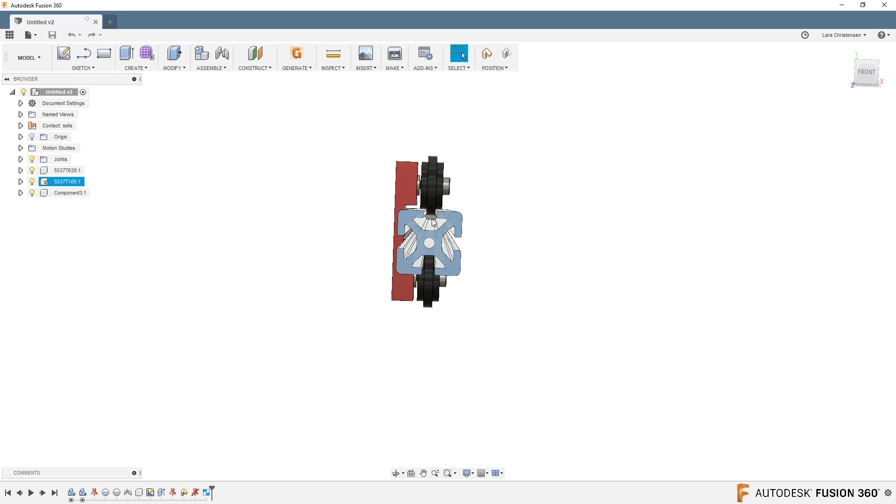But what we did was we brought this rail and this roller thing here in from the McMaster-Carr catalog. Then we created a joint origin that placed the wheel right on the track. We had a sliding joint, but then we put a limit on that joint so it couldn't roll off, because that's a good thing. We could also have used a limit on the other end, but instead we used these contact sets. That means that when this red bearing comes down and literally hits this gray block, it will stop. That's contact sets, found under assemble down here.

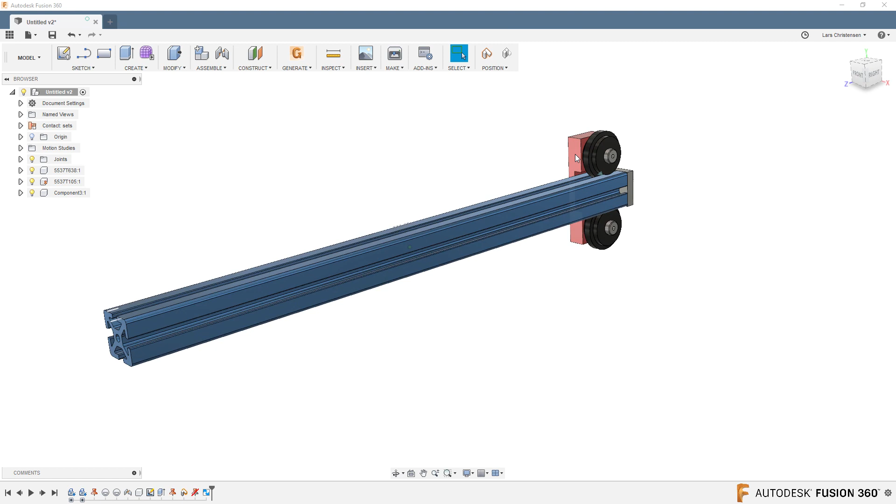Today you'll see I'm going to use the rewind revert position, which just means this roller is going to come back to its original state. So before we get too far into today's topic, I'm going to roll all the way back to the beginning and take you through it.

So we brought in the McMaster-Carr rail. Now you see how they kind of came in here in the middle of each other. We grounded the thumbtack, we grounded the rail, did that by right-clicking and hitting ground. Now we're not going to unground it. That makes sure that this rail is locked into place. This is going to be one of my, I don't want to call it bad habits, but kind of where the title comes from. We're going to change some of those things today.

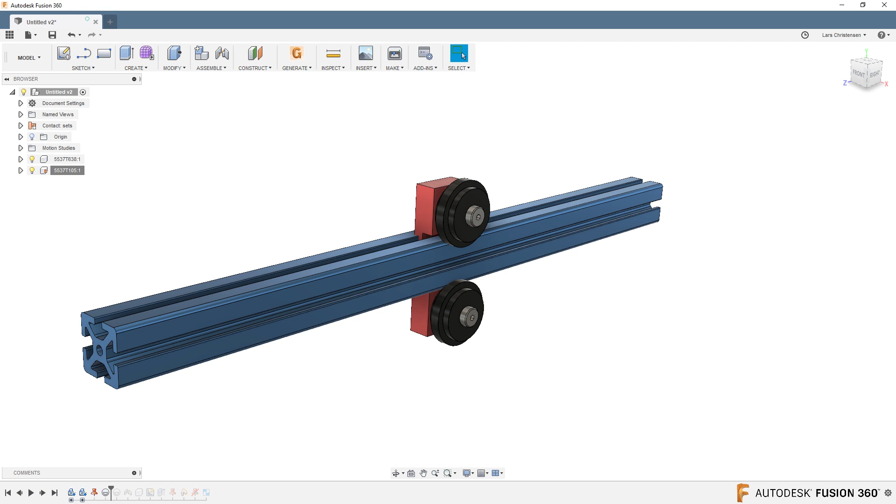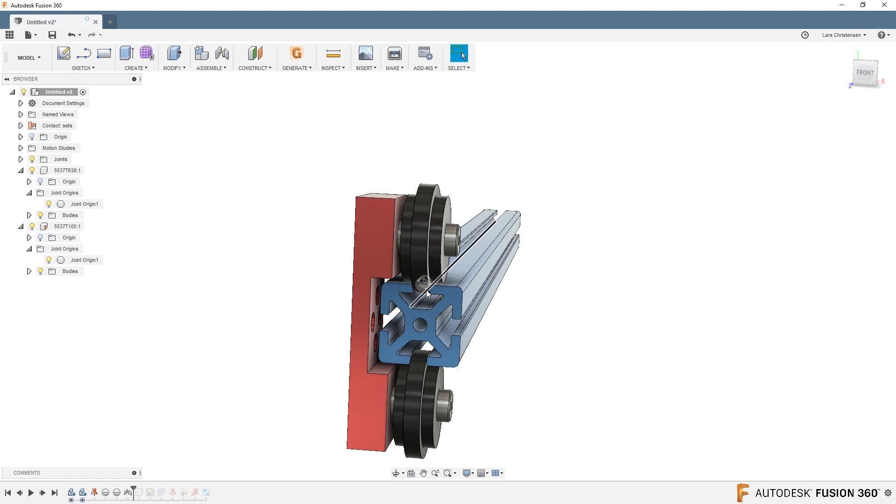After we've done that, we created two joint origins. Now they're not going to show up anywhere on the screen unless we go into each part, each component. You will see we created a joint origin on the roller there, and a joint origin on the rail there, and then we mated those two together. If you're wondering about those joint origins, again, live stream number 184, that's two ones back, so go a couple weeks back here.

And when we created that, we also created a sliding thing where, to limit it, we went into the joints folder, found the slider, right-clicked on it, and selected edit joint limits. We talked about the importance of maximum and minimum. But generally what we did was we said stop here, but then we just put a fictive number that let it roll off the rail down here.

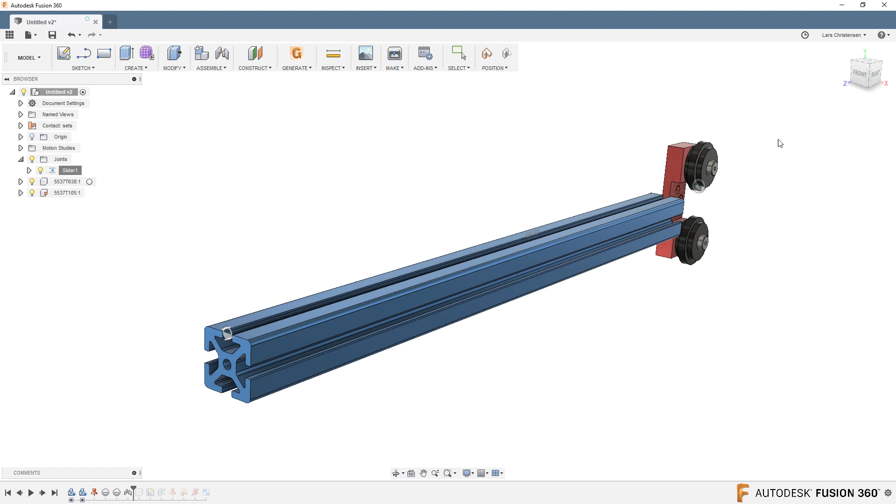And then I took the opportunity to show you that if we created a component, a couple of sketches, I kind of created this little block down here, a stopping block. Now that one at this point was floating around, right? So what we did was we thumbtacked that one into place by right-clicking on it and saying ground. So now that is in place.

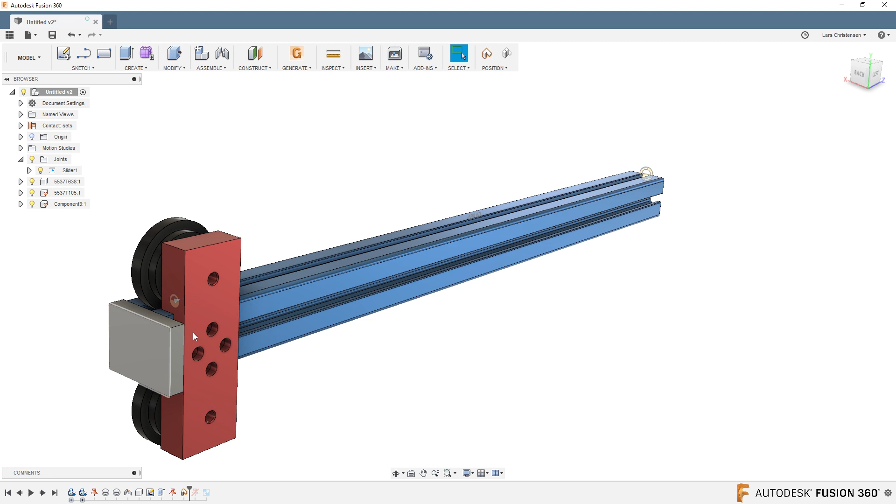And then I did slide down with a revert here. And then we created this contact set so that when the red portion slides down and hits the gray one, it stops. So a little bit different than a joint limit, where we actually have these two joint origins kind of like limit their travel. With the contact set, we're actually kind of banging into this gray piece, and that kind of resolves that.

Now, I talked in that live stream at the end that using thumbtacks maybe is a little bit of a cheat. You could instead, and then I deleted it or removed it, use a rigid group, also found under assemble, where I grouped these two together as a rigid group. It means they couldn't move. So that is this part you're seeing on your screen here from live stream 184. So maybe you need to rewatch it, maybe you don't, maybe you're all set now.

I don't know, all right, so we're 6 minutes in here. Hope that was a good review, just trying to catch you up. If not, again, watch 184. Let's move on. So the question that came out of this live stream, but was a very good one, a couple different ones, was that, okay, this is all cool, we now got this thing moving along here.

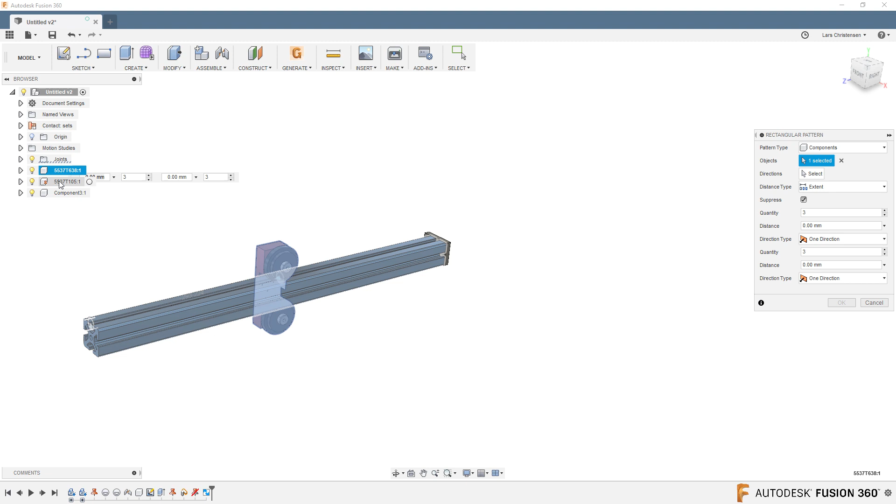Revert back to center. What if I wanted to pattern this? We could go create pattern, and let's do a rectangular pattern. Click on that, and instead of selecting faces, I'm going to select components. I'll select 1, 2, 3 components, then say in a direction, and select this edge here. Let's drag a couple of patterns out and hit OK. Okay, that looks pretty promising, right? Until you start moving around here and you realize this is maybe not what you wanted. You wanted this.

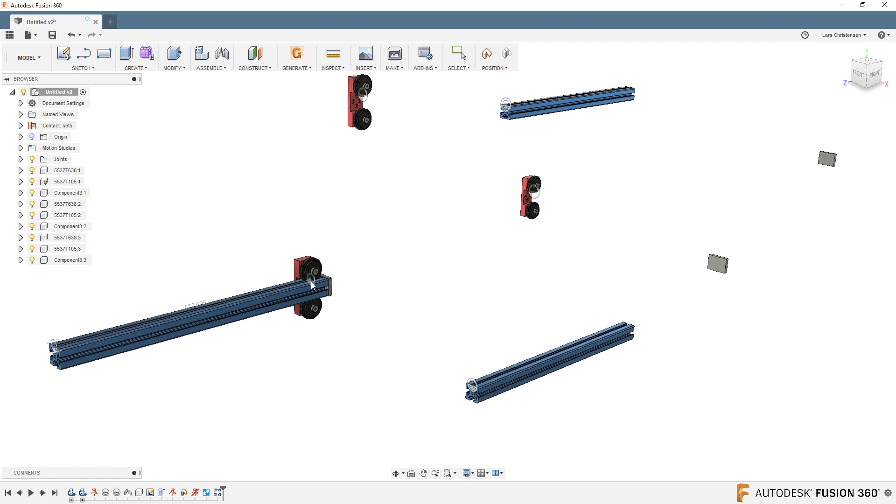Let me just go delete that rectangular pattern, back to normal. The other question was, I have this, now I want to mirror it.

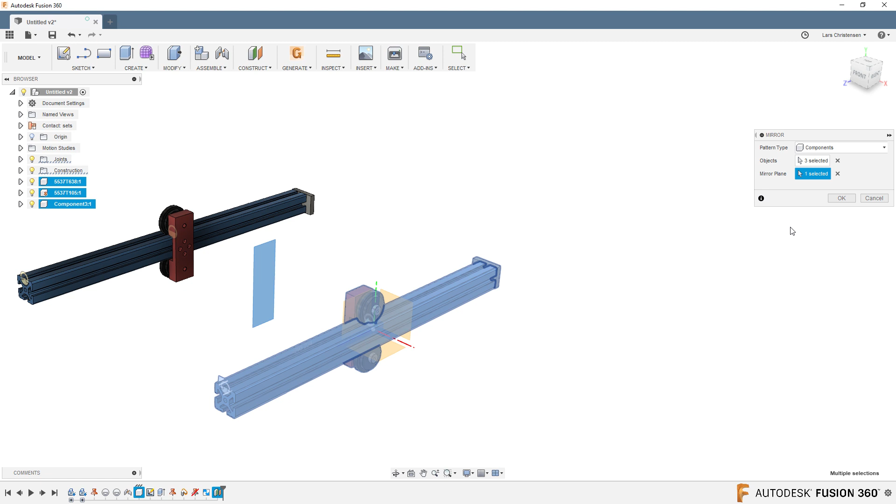So we click mirror. Let's do a mirror 200 millimeters from this face. Do kind of the same thing, go down here and say mirror. Instead of faces, let's say component. Let's select those 3 components. Boom, let's mirror it over this plane. It all looks good, but kind of same issue. Everything's floating around. I want this.

Do I really have to do all the work? This is not really what I was expecting, Lars. Come on. Well, what are we going to do?

Well, we have a couple of different things we are going to talk about. My goal today is to shine some light on the ways that Fusion handles some of this stuff, and hopefully that would be somewhat useful. So this is where it kind of comes into Lars's bad habits, and I do have them. That's absolutely true. What happens is the same thing that I think happens to most of you guys.

You're modeling things up kind of in the order of what you think you're going to need it for. So when I modeled this thing up, I never really thought about somebody gonna say, well, we gotta pattern it. And this happens quite a bit to me too. So don't think you're out of this, where you model something up and then you're thinking, all right, now I wanna do this, and then you're like, oh, wait a minute. So we're gonna talk a little bit about best practices, and doing things possibly a little bit different, and see what happens in Fusion as I model this up here.

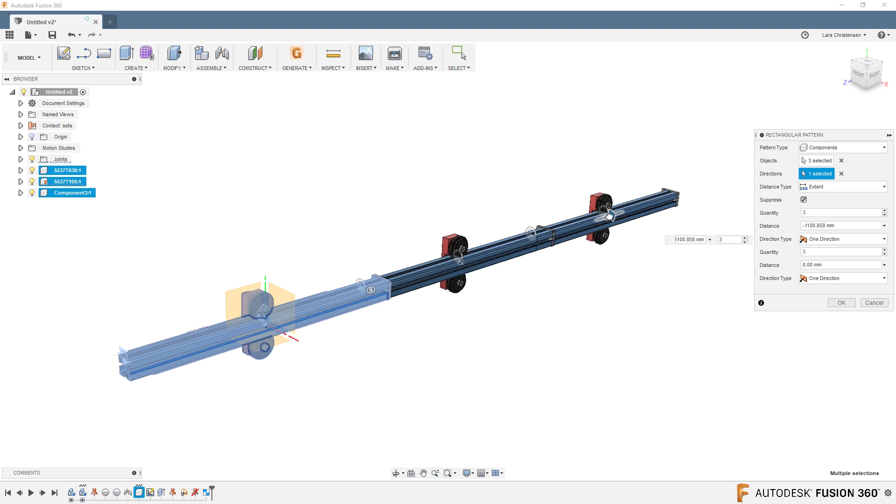For example, let's just use the pattern example right now. If I go in and say a rectangular pattern, we saw that before. I select the components and I do a direction. But what happens here is that I'm just patterning the components. I'm not patterning the joints or the contact sets or anything like that. So that's the first thing to understand, that when you say pattern components here, well, that's all it does. It just patterns the components.

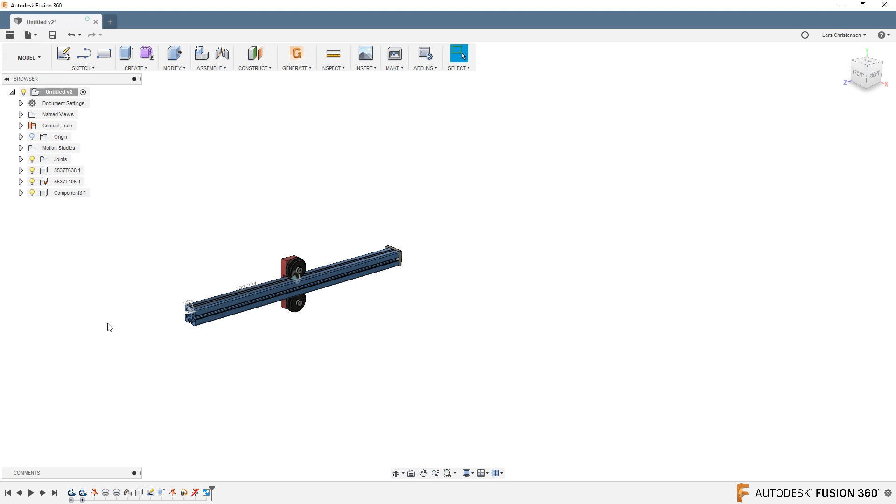Now there is a way around this, and I'm gonna mix in what I would call my bad habits as I'm going along. But check this out. If I went in and created a new component up here, see right now this is an assembly. We know this is an assembly because it has the assemble icon up here, and then we have 3 components within that. That becomes an assembly, and that's the only place we can make joints, really, is inside an assembly.

If I go up here and create another component, there's nothing inside this one right now. Let's just right click here so we can name it. Let's call this a sub-assembly. Now again, there's nothing in here. And by the way, while we are naming things, let's go up to this end plate and rename that. And also the rail, because this is the one that's going to matter the most as we're going along here. We could call this a wheel.

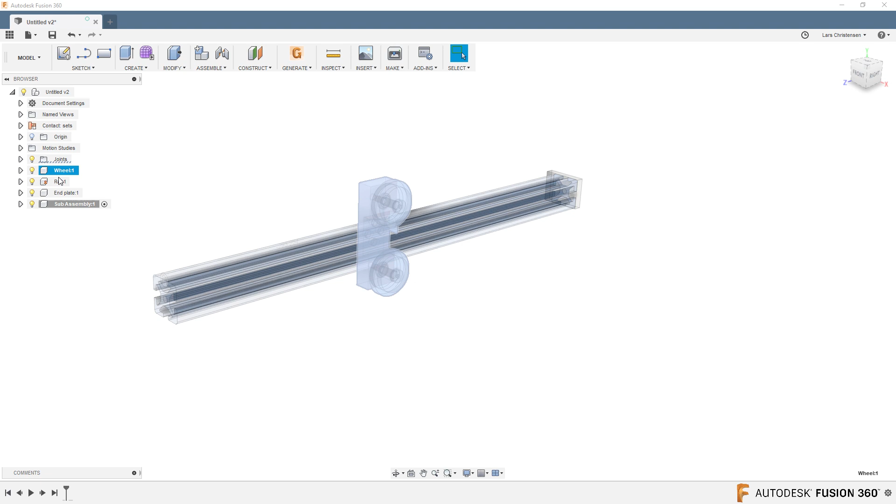Now we've done all the stuff we needed. Okay, see right now in this sub-assembly, check this out. If I go up and take the wheel and the rail, hold down control, and the end plate, and drag them into this sub-assembly folder, then this does become a sub-assembly within the assembly. See how the icon changes? Let me just do a Control Z, undo. See how here it just is normal, it's just an assembly. It's not a sub-assembly, it was just something we named it. But as soon as we drag these 3 components into it, it now knows it's a sub-assembly.

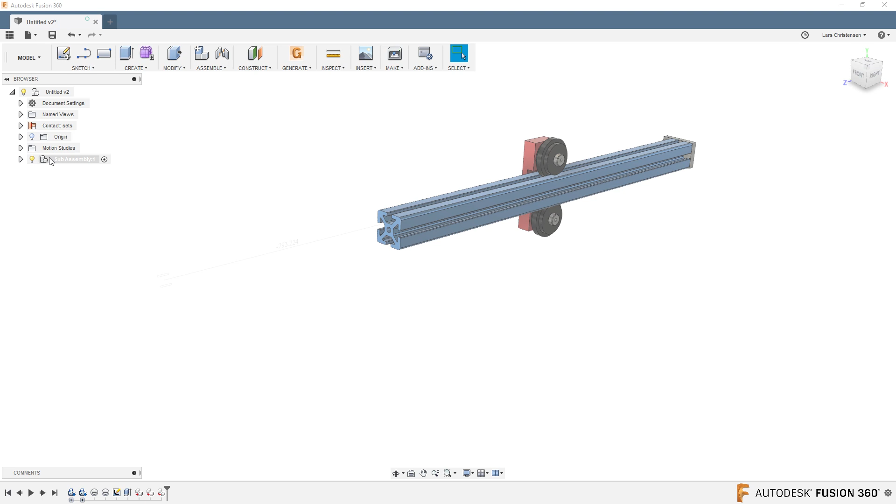Now notice an interesting thing here when I hit the little arrow next to it. The joint folder went with it.

Okay, that's interesting. So when components with joints get dragged into another component, it becomes a subassembly and brings the joint folders with it. So remember that. That's a good thing when we're getting into patterning it.

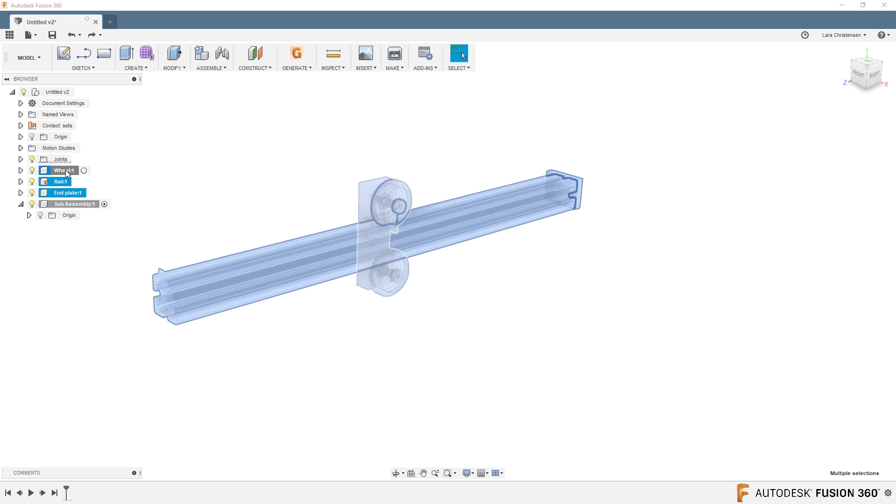Let me just do a control undo again, back to here. We had the rail set with a thumbtack on it that had been grounded by right-clicking and saying ground - that's just putting a nail in space so this thing can't move. Also note that inside the joint, besides our slider, we had that rigid group where we grouped these together. Notice what happens when I drag these three components into that subassembly - it makes it a subassembly. Notice the thumbtack is gone and the rigid group is gone. What that really means is when I dragged it into a subassembly, everything is loose.

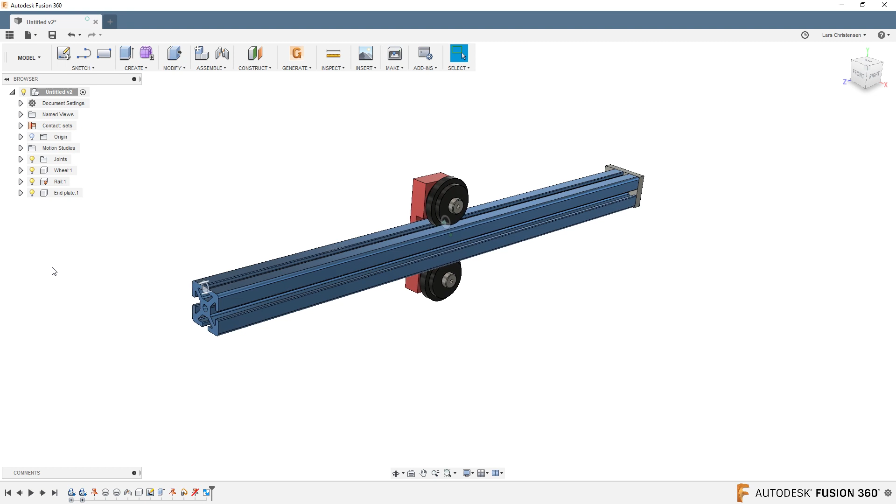So this comes a little bit to bad habits from Lars, if you want to call it something. Let me just delete this subassembly again and go all the way back to when I started this whole thing. Now I'm back to where I started, like when I brought the file in. So a couple of things here that I call my bad habits, or things you should be aware of when you're working in this environment.

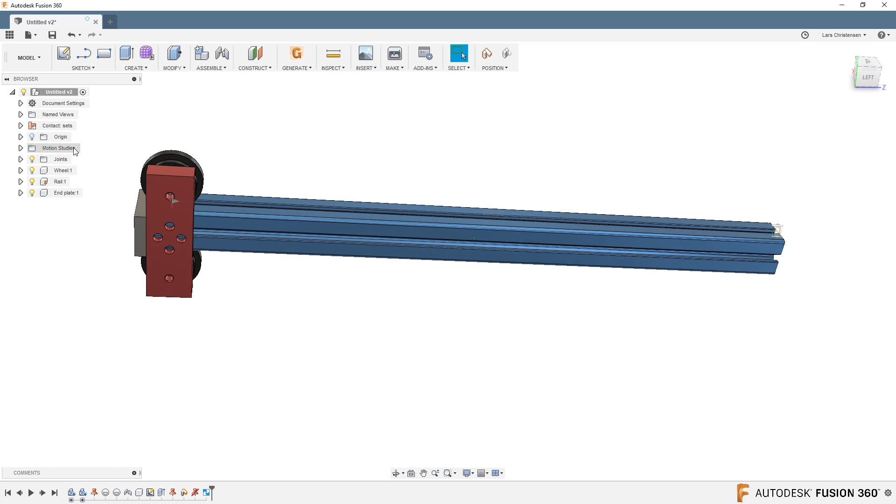First off, be aware of the contact sets. Remember, dragging this thing up and slamming into something - contact sets will always work at the top of an assembly. They cannot go down to sub-assemblies like we did before. So that's important to know. And then also, as contact sets are cool because they kind of see that stopping block and slapping into it, they are very heavy on computer power.

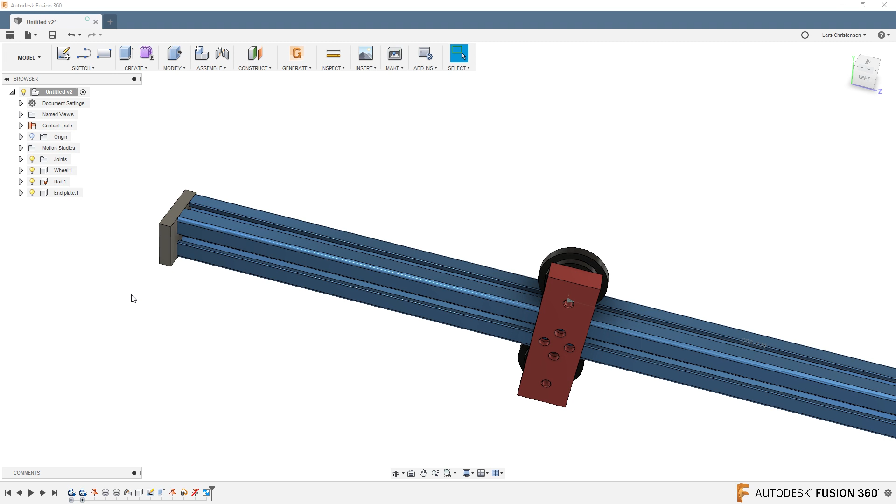So as your assemblies get bigger, contact sets could drain it down. So for my first bad habit, I'm actually only going to use contact sets whenever I really need it and couldn't use a joint. So I'm going to right click here and disable the contact set. Now you see it's gone. Again, if you didn't watch live stream 184, contact sets sit under the assemble dropdown. This means that now this thing can drag back off here.

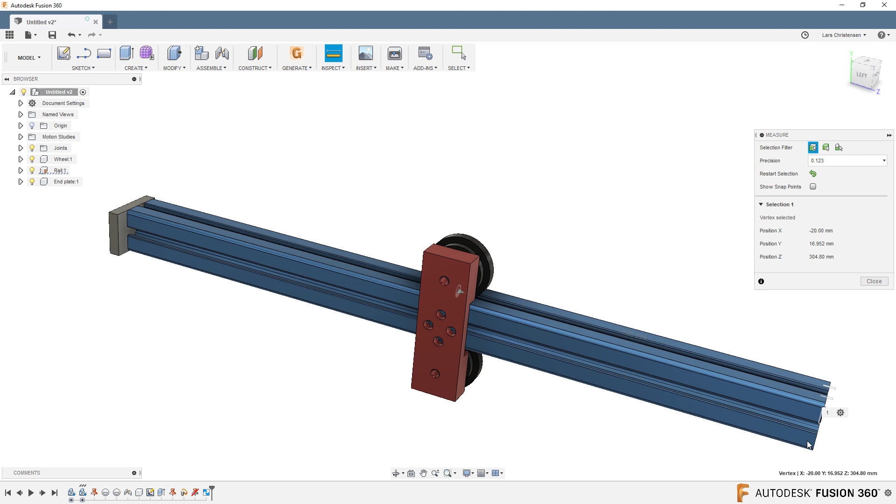So what I'm going to do is a quick measure - I'll select a point over here on the edge of the rail and a point over here. And if I check XYZ delta, that will give me the distance - 609.6. I can't remember anything, so I'm just going to click on this. Now it's copied to my clipboard.

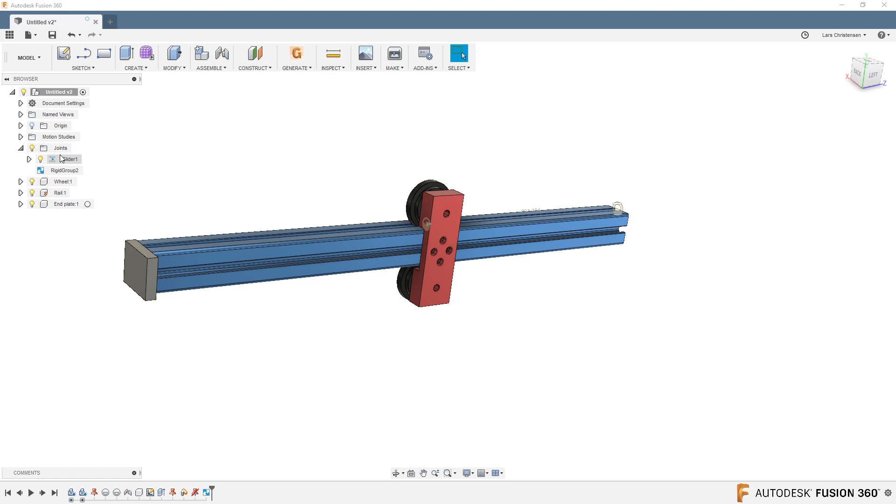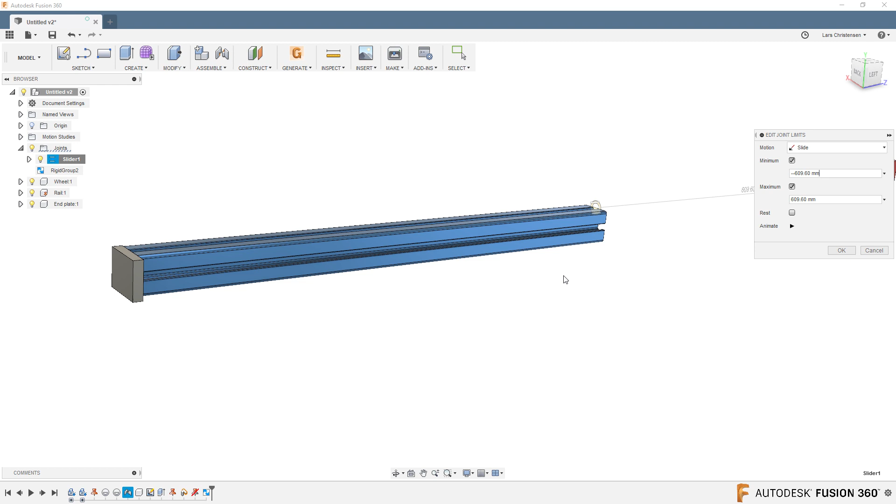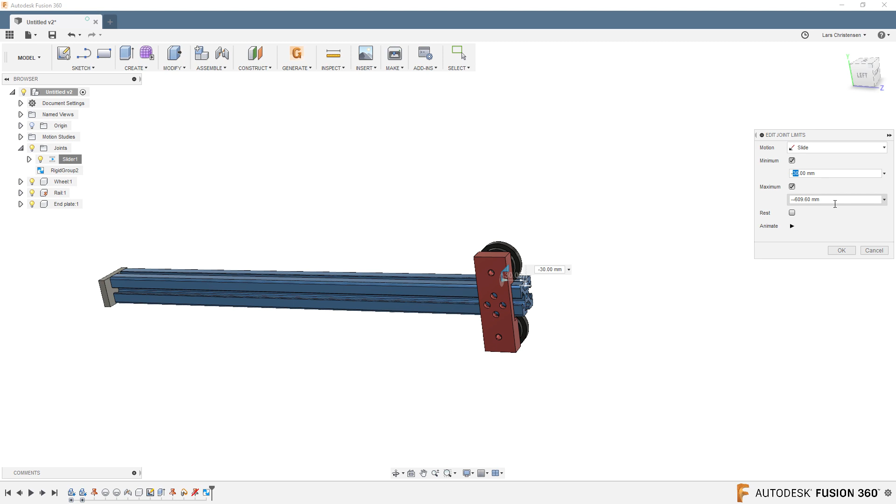Let me go into the joint, right click, edit joint limits. And on the minus here, I'm going to say minus and paste that number in. This is when we talked about Friday, that this can be a little bit tricky. Oh sorry, I'm doing this wrong - this always has to be the minimum. I messed it up. Minus 30. There we go, that should do it. I had two minuses in front of it.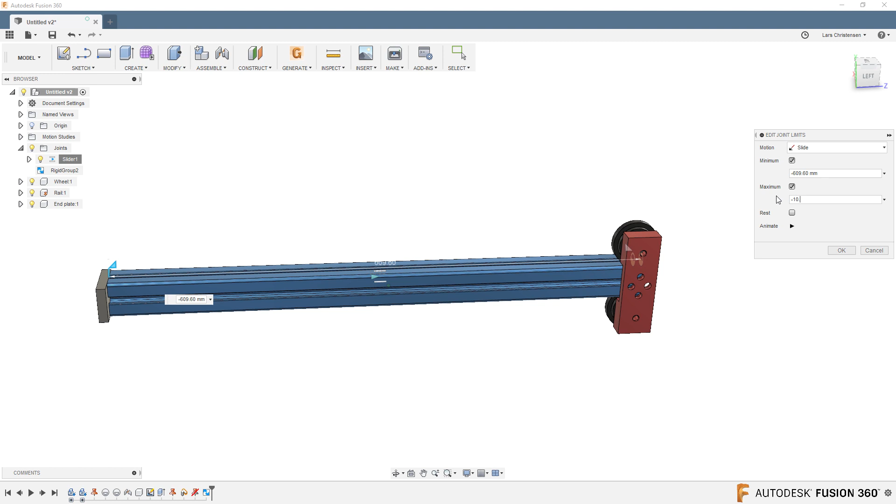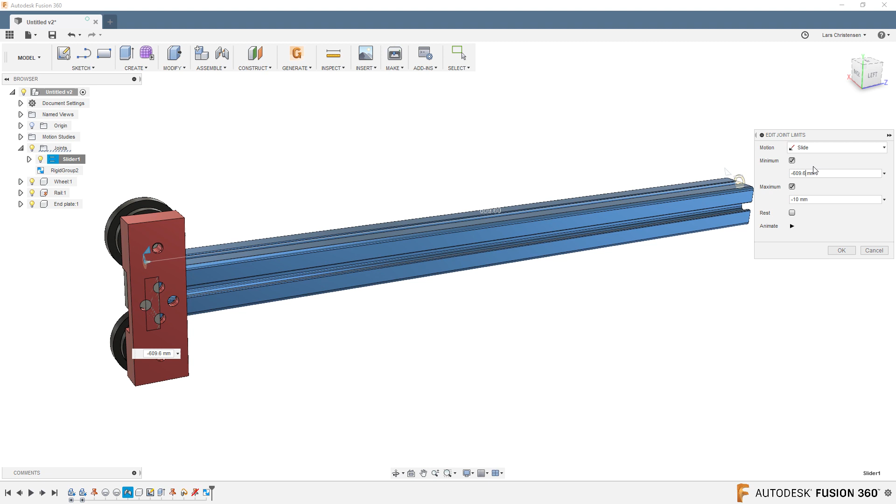Now I got this messed up. Hang on. I was in such a good rhythm. 609.6, there we go. But then I just noticed that this thing is actually halfway through, so it should probably be 589. There we go. I don't know why this does not want to stay at 10.

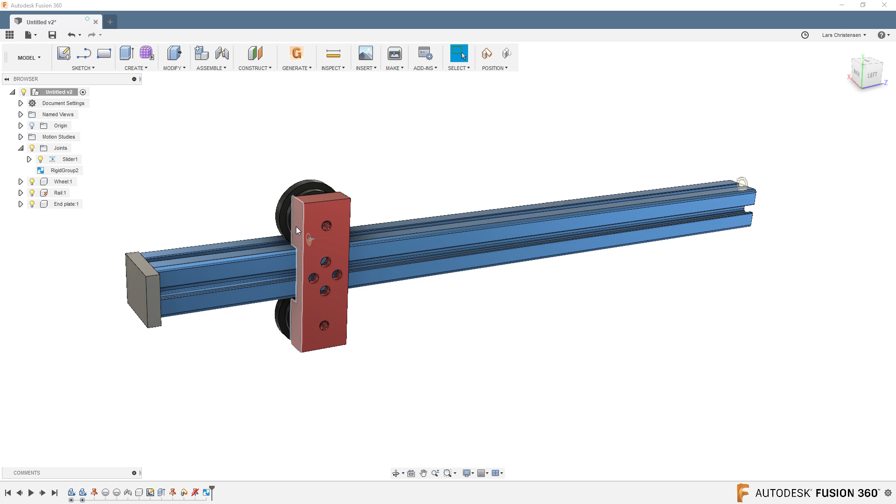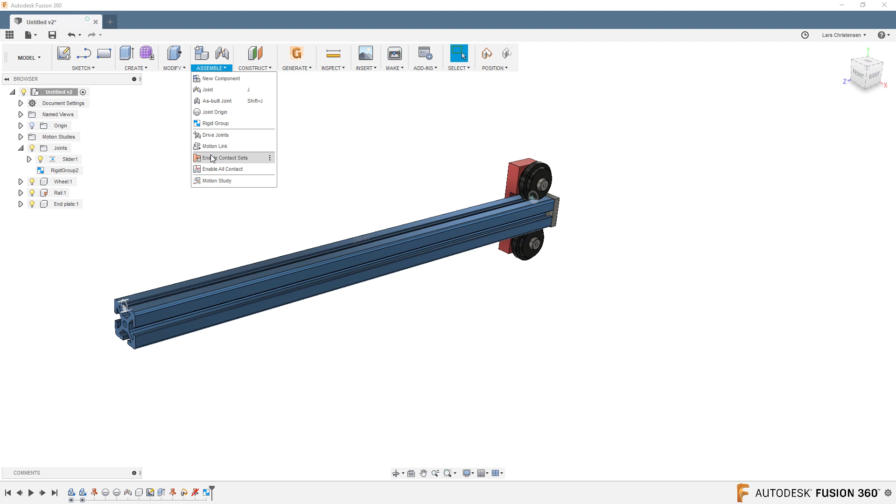Okay, now we got the travel. So instead of enabling contact sets, we changed it with the limits instead, and then we solved that problem. Get rid of those if you can. I'm going to do another live stream on heavy duty assemblies later on, but that's a good habit - to only use contact sets whenever you really need it. In my last live stream, I was just kind of trying to show you it could be done.

All right, so with that done, we have eliminated that issue when we go into pattern this. The next thing is this rigid group that I used - you saw that didn't come in either. So I'm actually going to delete that here. But of course, that means that now this floats around.

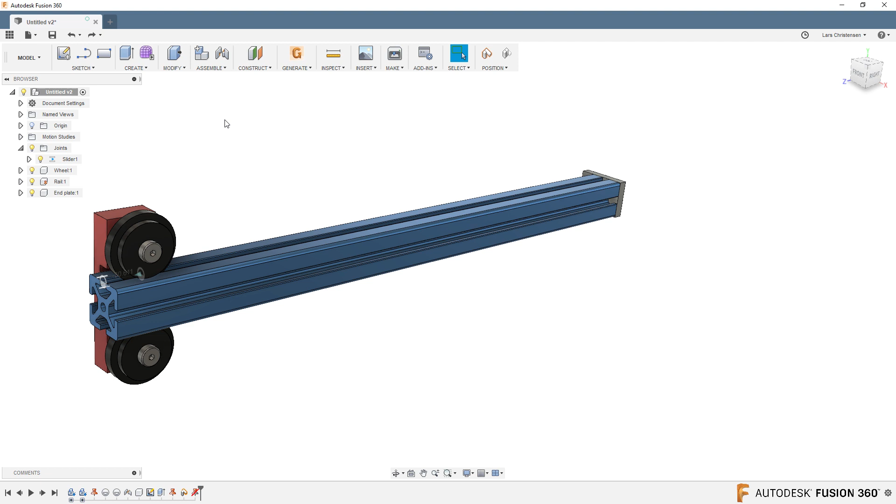And that brings me to another best practice. Rigid group is cool, but there is one that is better, and that is called as-built joint.

If you select as-built joint and select those two components, you can specify that they are rigid, and it will do the same thing as the rigid group did. Let's delete that out of there. So again, we still have the movement here, but instead of being rigid group, this has now been as-built jointed.

And that actually goes for the rail too. Instead of using right click and ground, let me unground this, you could here also use as-built joint between this one and then the top up here.

All right, so now this thing can move, this thing, I just deleted that before, didn't I? As-built joint.

Okay, now in the joints folder, we have the slider that we have now solved, can travel back and forth. We have the rigid group going from here up to the top, and then we have the rigid group between these two.

So now, when we have done that, my bad habits, whatever you want to call it, if we go in and say, all right, let's now pattern this. Oh no, first we got to create a subassembly.

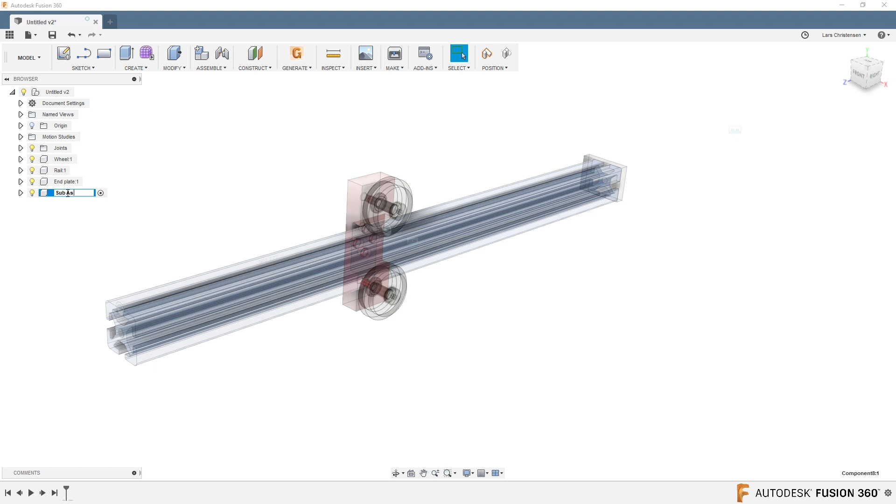Right click, new component. Again, this is just a component. I rename it subassembly, like this. Let me drag our three things in here, like this. Now that's a subassembly.

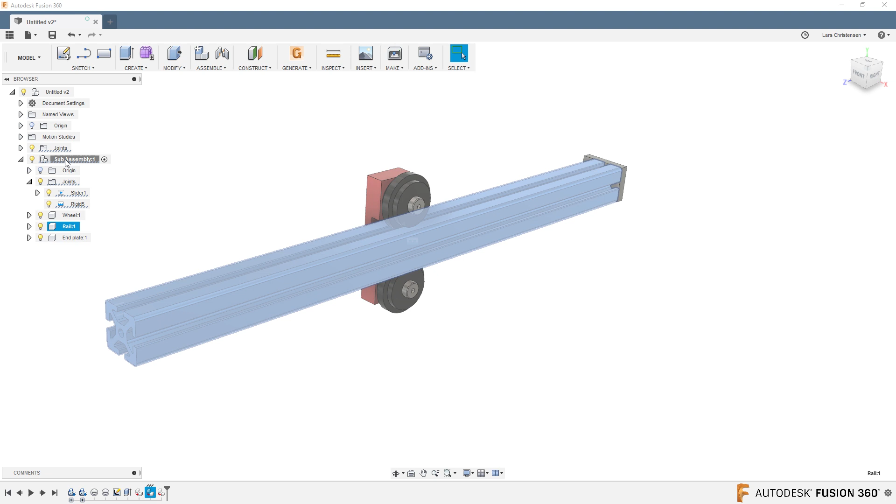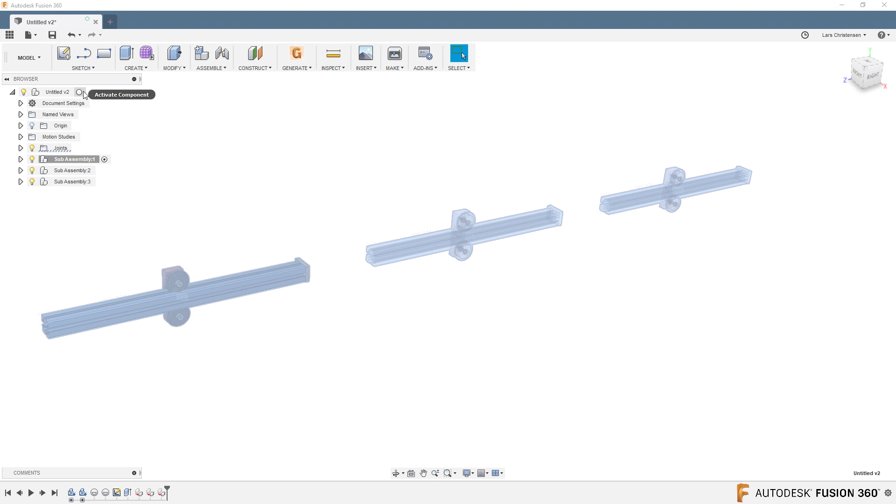Now check this out. This will still move like this, but all I have to do now is go into the second subassembly, say as-built joint. I'm going to select that rail again up to the top, and now you will see that one now has the joint with it.

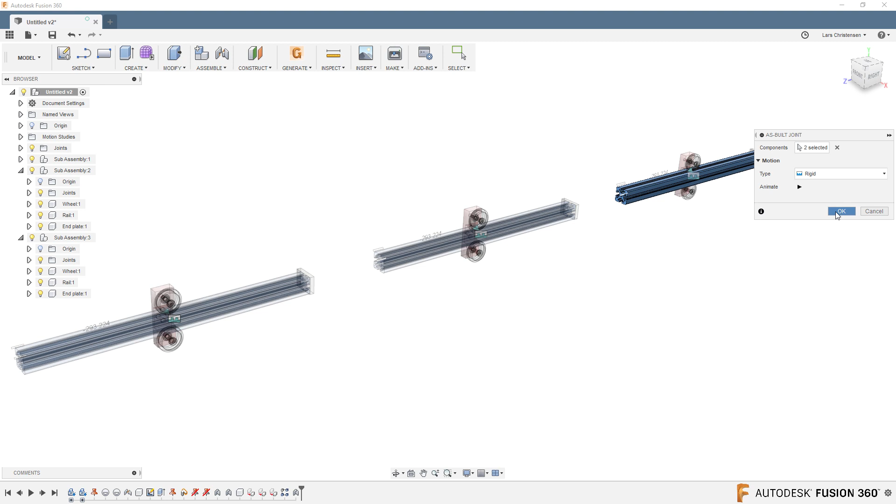And then I want to do the same thing to subassembly 3. So if you are patterning with this, go in and use the as-built joint and do that up to the top. So now you have patterned this with the 3 there.

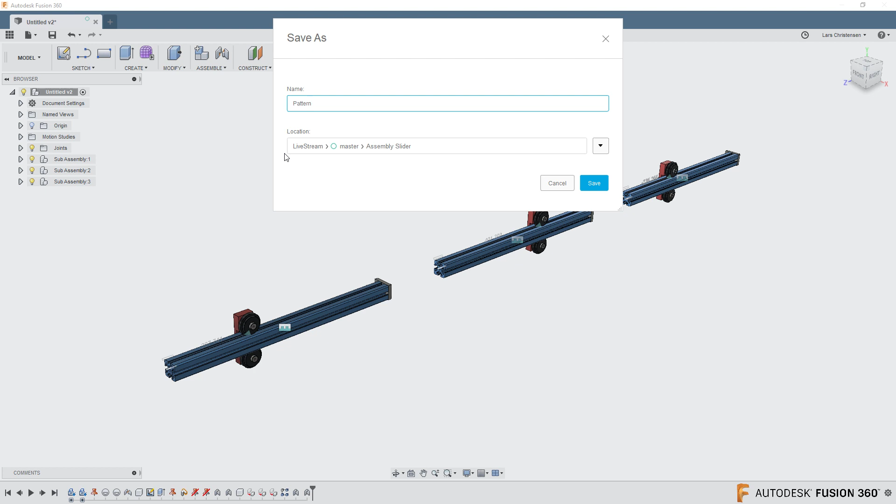Now, before I finish, let me just save this out. I'm going to go ahead and say save as, and let's save this as pattern, I don't know, pattern, that's good enough. Save it in the same folder there.

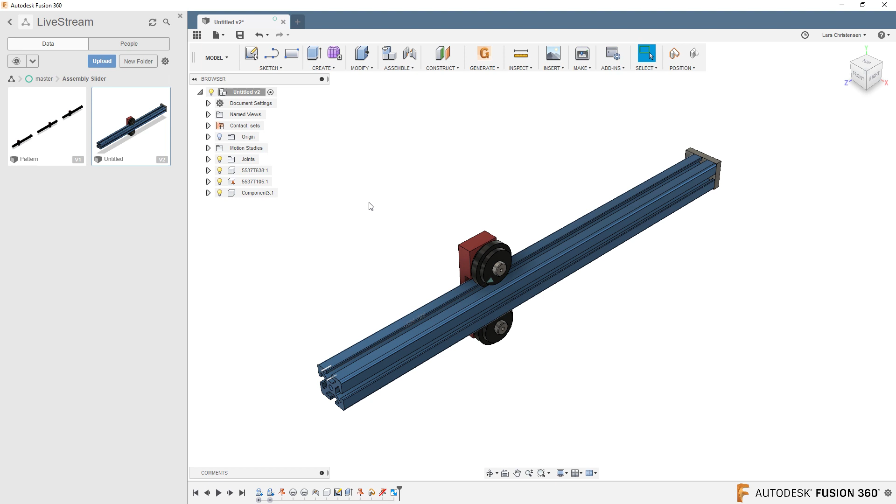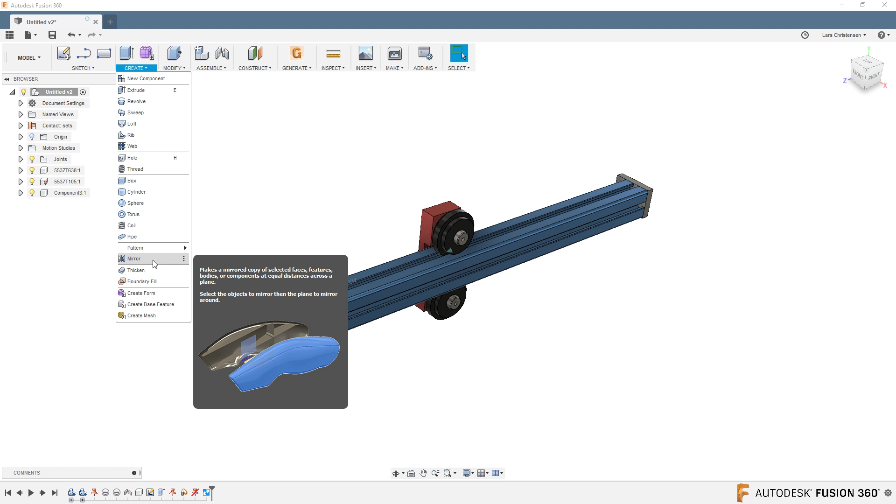Now if I go back, so now we have the untitled and the pattern there. Now if we go back to the original one I did before, you might say, all right, give me the mirror one. Well, in the mirror, the same thing happens, except a mirror command will not bring the joint over like the linear pattern did. So you have two different options if you were going to do this.

Now, what I would actually do instead, if I was going to mirror this over, I think I would save this out as its own file. So what I would do was probably go back to my bad habits and get rid of the contact set, right? And then I would go into the joint slider, edit the joint, and change this here to minus, what did we figure out? 590.6.

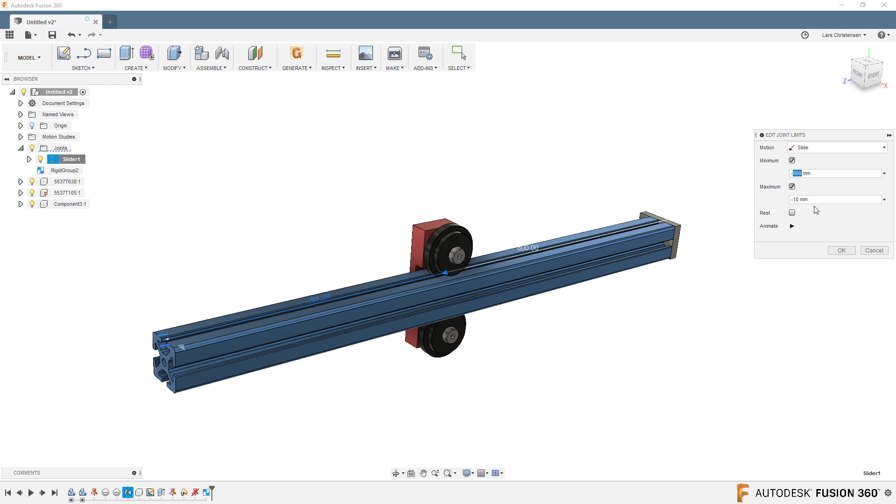So now the slider is going like this. I would get rid of the rigid group because we've kind of determined that that works for whatever. It's not that this is bad practice, it works for whatever you wanted to do. But if you're getting to this point, then you might want to get rid of it. And then instead of using the rigid group, it might be better to use as-built joint. So select these two.

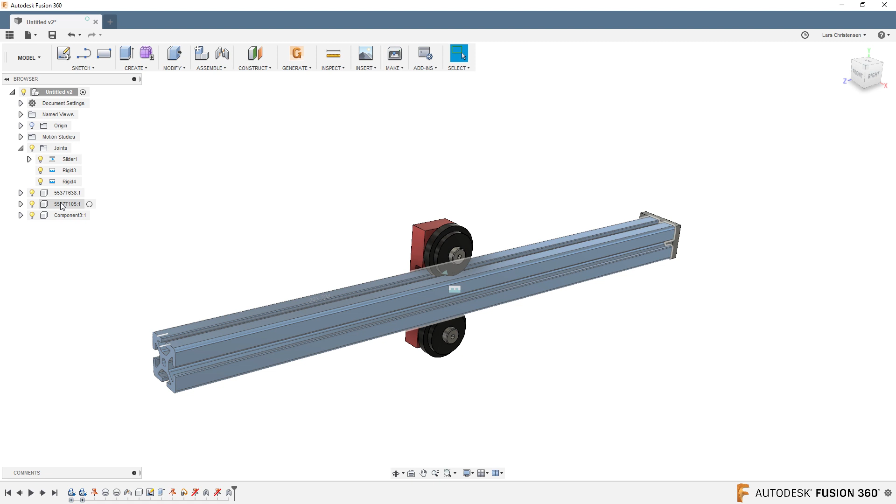And then we could decide that we just don't want to use ground. We could leave ground, but just say that we don't want to use it and continue using as-built joints. The only thing I don't like about as-built joints is that you don't see which one is grounded, versus if you right-click and ground it, you get the thumbtack here. That's maybe my only issue.

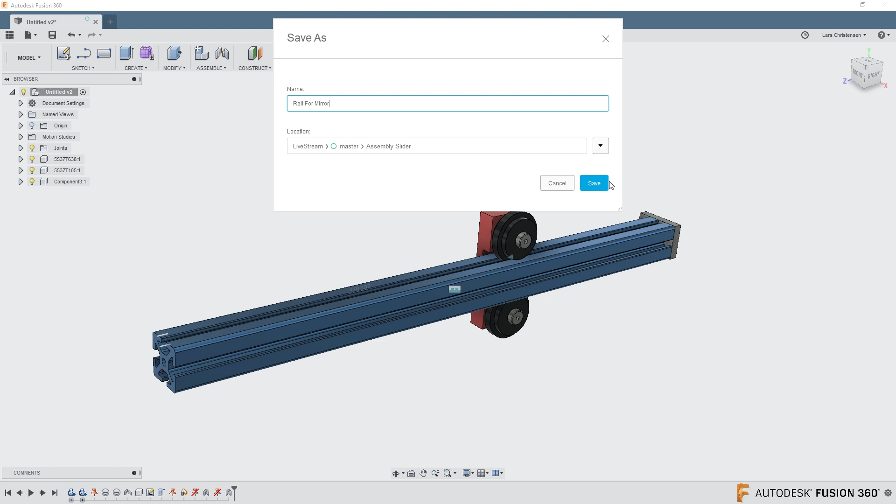But now we're kind of back to where we were before. So like I said, there's no real reason here to turn this into a sub-assembly because joints don't come with it. So we could just save this as rail for mirror, like this.

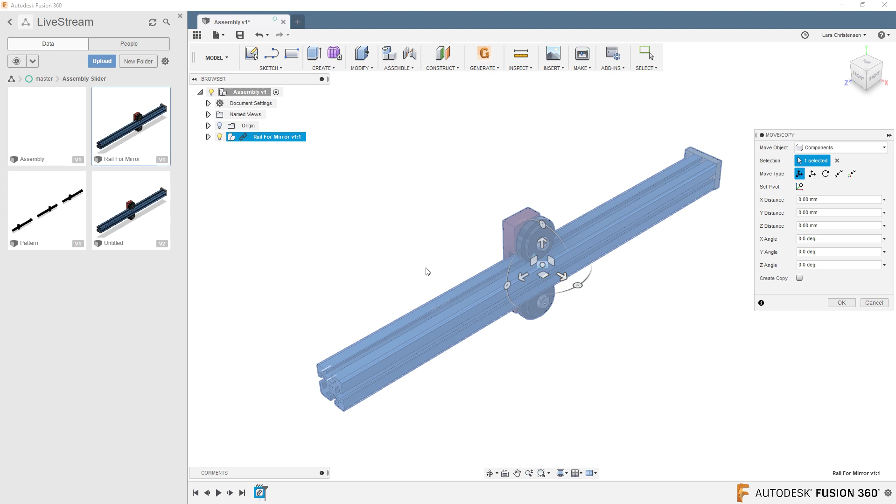And then what I would do, now that we have that one out there, is start a new document and save it as an assembly. So this is just an empty document right now. Then I would insert this one. Right click, insert into current design. Comes in here, right? We can hit OK here. And again, as we talked about before, you can break or unbreak the link, whatever you want. Now this one is, again, floating around.

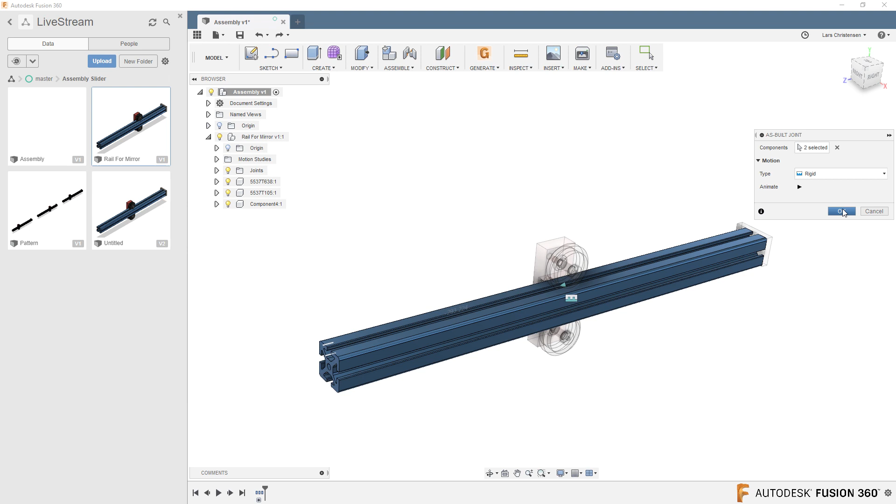So the same principles we did before: as-built joint for the rail there to this. Okay, so now this is working. And then instead, if you want to get a mirror, you have a couple of different options. You could go in here, insert another one.

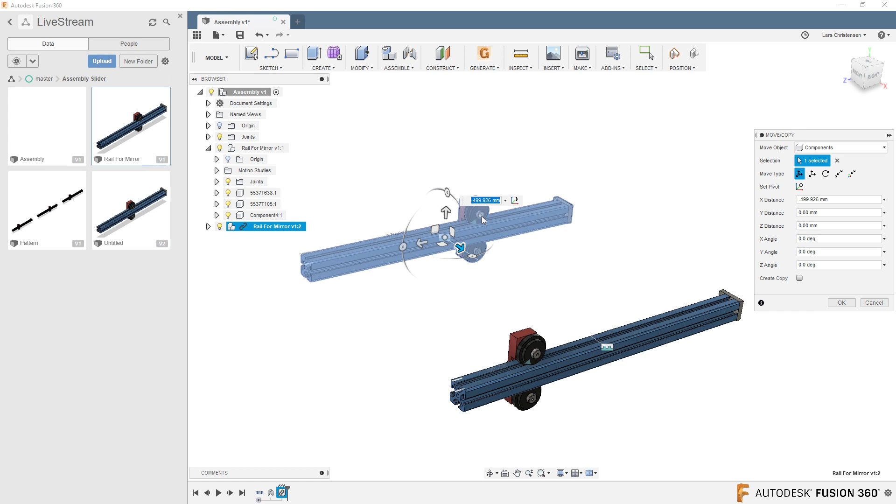Now it's going to come in on top, but remember you get this free move when you're inserting the second one, and this would not be mirror, this would be rotate. But if these two wheels are symmetrical, you could just drag it around like that, right? Because you get this free move.

And then we could do the same thing. Right click, I like to break the link. And then go in and do the same thing as before, and say as-built joint, here to here. And now I have that there, and I have that there.

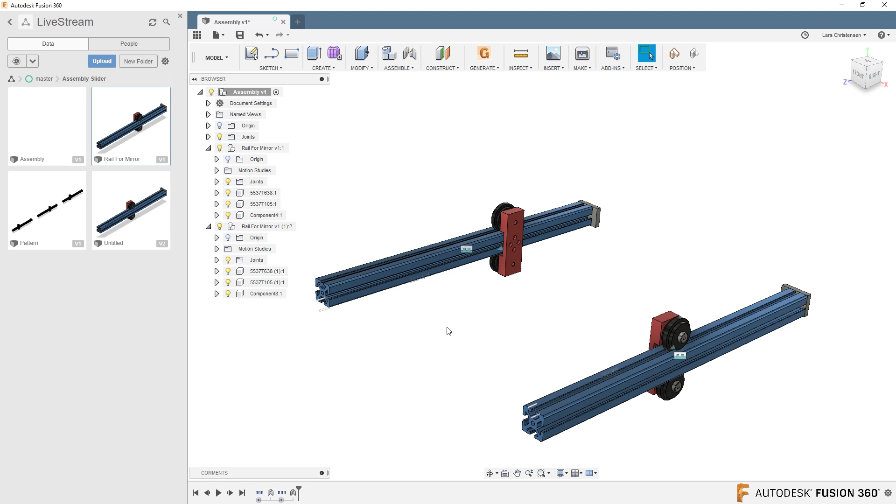If you do want an exact mirror, because these might not be the same, then the trick would be to actually reinsert those joint origins. So what I would do at that point is offset this to the right distance. Let's go and find the wheel here. Let me just delete that for a second. So now that is deleted.

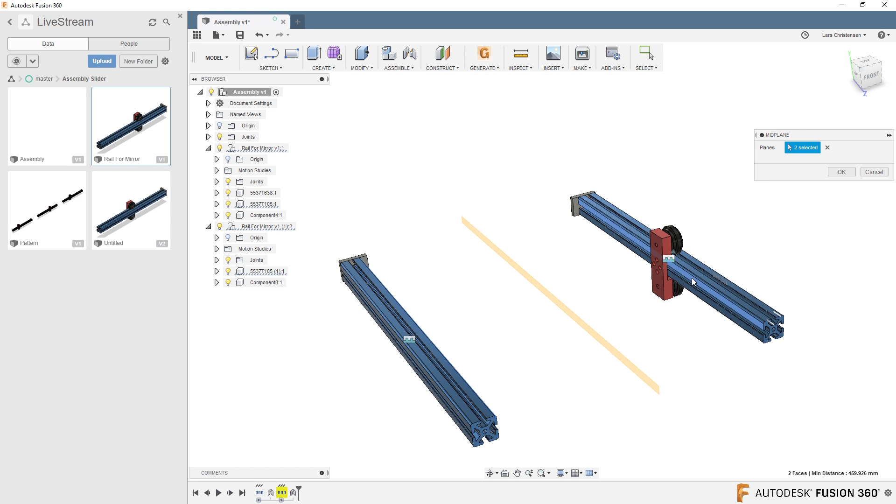We could go in here and create a plane, a mid-plane between this face and this face. Then you could go in and say, I want to mirror this component over this plane. So now it is a mirror of the original.

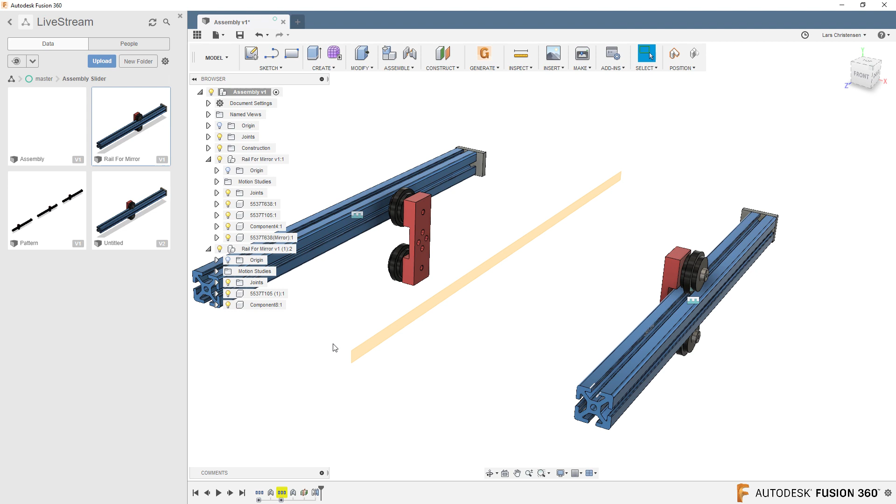However, this thing is now floating around in space, and now you would have to go in and redo those joint origins again, as we did in the first live stream, and you could place it back in there. Now you would have a mirror of it.

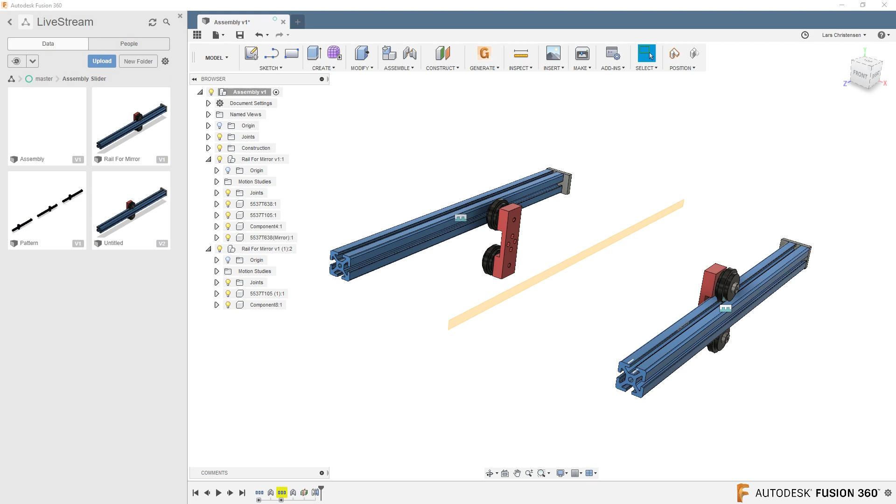How was this? Was this rough for Monday? This might have been very, very rough for Monday. Feel like I jumped around a little bit. I hope this was useful. That was what I was planning on sharing today. It is hot in my office, friends, if you can see me sweating here.